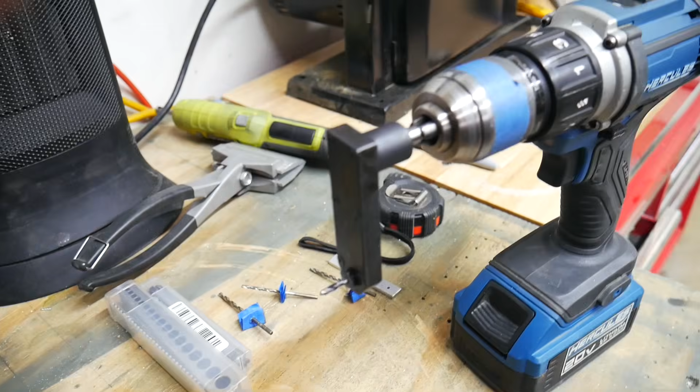All right, first up, I'm going to talk about this new tool that I bought. If you happen to follow anything having to do with Sonex, you've probably heard of a guy named Brian Cotton, very well-versed Sonex builder. He peruses all of the forum sites and Facebook pages and all that kind of stuff. And there's this thing that's come to be known as Cotton's Law, and what that is, is that the whole purpose of building airplanes is not to build an airplane, but to have a reason to buy tools.

And so he has mentioned several times to me that I need to get something called a pancake drill, or pancake drill adapter, I guess. I'm not sure exactly what it's called, but essentially that's what this tool is here on the front of my drill. Basically, there's a shaft that comes off the drill, turns a gear here, and turns several other gears until you get the little drill bit down here to spin.

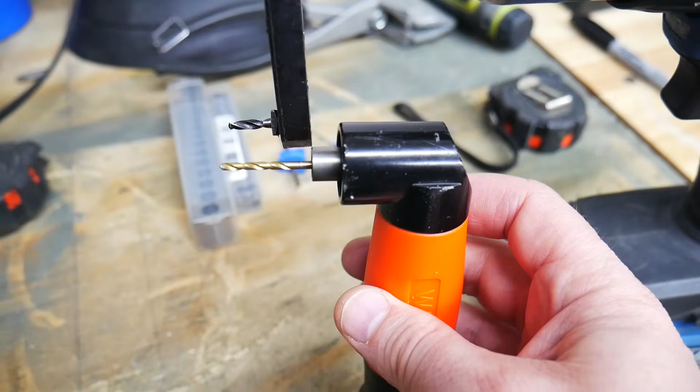And what that allows you to do is get in some really tight spots where you might not have any ability to drill otherwise. So you can compare that to this 90-degree drill bit here that I have, and you can see that, if I were to line up the tips of these two drill bits, I'd have to have a lot more clearance even to get this in there. But with the pancake drill bit, I can actually get into a spot that's only about 1 inch wide to be able to drill a hole where I need it.

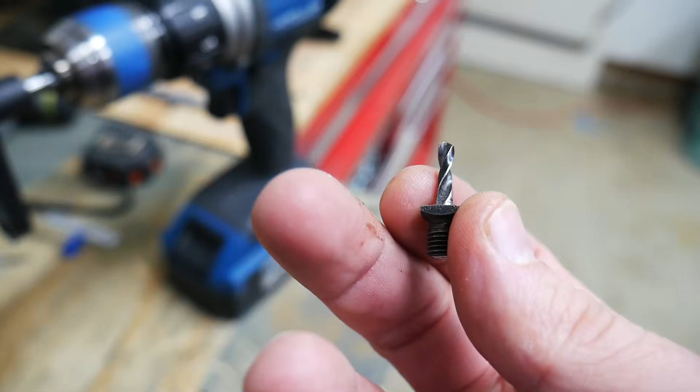And I also found another set of these little bits that you can get for it. These are 1/4 inch, 28 threads per inch drill bits here that screw in. And you can buy these in bulk as well, different sizes. I happened to find another used lot on eBay that had just a smattering of different sizes. So this is the size 30. I think I have a couple of them in the little bag that I bought. But I have used it to great avail, and it works really well. I'm very happy with it.

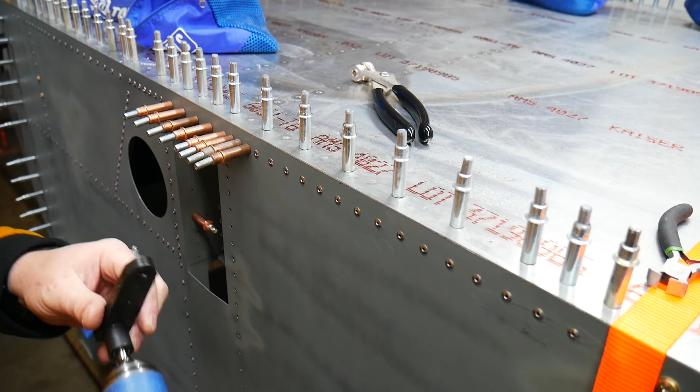So the throw on this is long enough that I can actually get into the second holes in here, which is where I need to reach, and still have enough room for my drill to get in there and do the job.

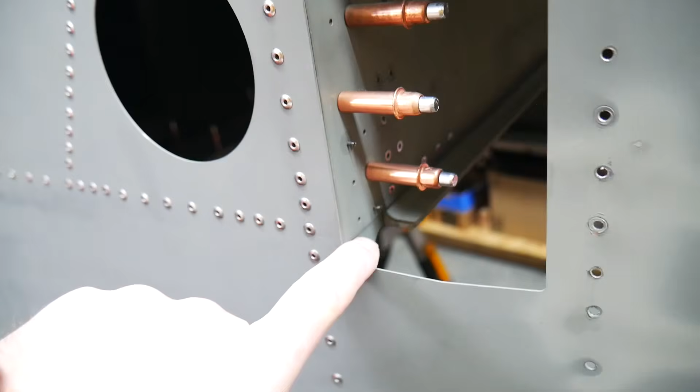So technically I could probably drill these holes from the inside, kind of just drilling in this direction with a longer drill bit. But when you put in a longer drill bit, this is so close to the edge here that my drill would actually bump up against the side panel, and it would possibly twist the drill bit a little bit to the side. To get this a nice straight drill, that pancake adapter is actually the right tool to do that. So thanks, Brian, for the suggestion. It seems to be working fine.

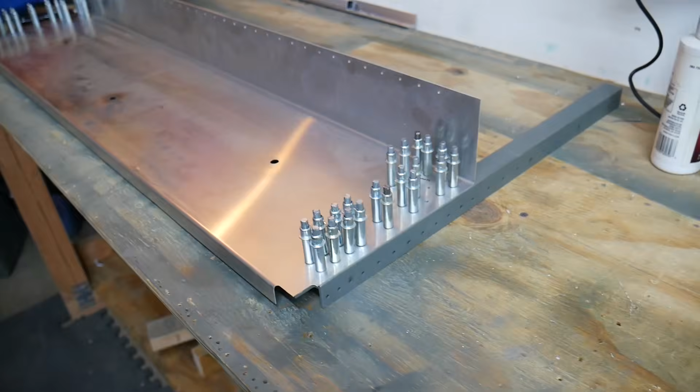Alright, now it's time to get on to sort of the meat and potatoes of this video. This is my forward tunnel Z. It matches up on the inside with the aft tunnel web, which kind of goes across the fuselage here. And the forward tunnel Z kind of goes across the front here, and we'll close this off into a box. And that is where our wings are going to slide into place, one from each side. Then we're going to have to do some wing rigging at some point where we put this all together and we have to drill a hole.

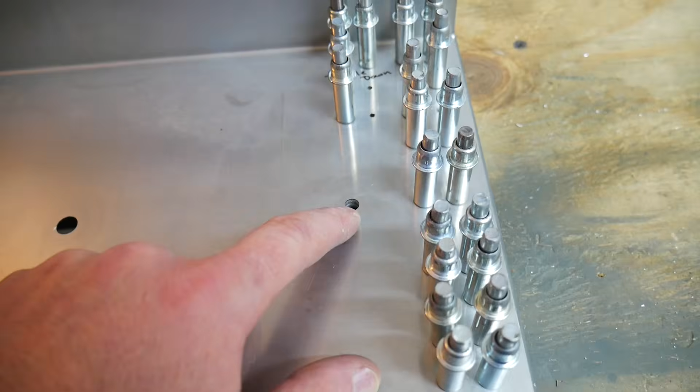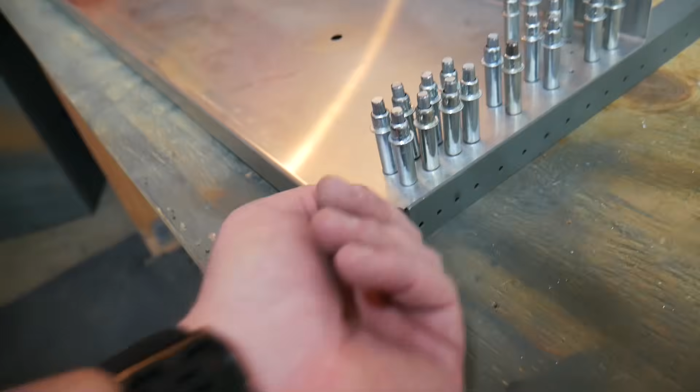Eventually this hole is going to become a 1/2 inch, and it will be drilled all the way through the wings, through the ends of the spars here as well as here, and that's what kind of attaches the wings to the aircraft. So basically what I need to do is there's a couple holes here that I need to pilot drill from the other end first, and then we're going to up drill all these to 1/8 inch size. And then we also have to countersink the parts that this attaches to. So this angle here, and there's a couple of other parts underneath here that also have to get that countersunk, so they have a bevel.

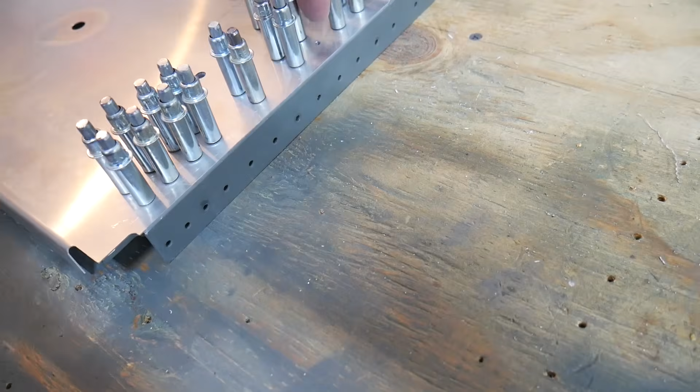And then we're going to have to dimple the holes that are on this side through the sheet, and that is to accommodate flush mount rivets that are going to go through here. So that's what we're going to do today, and hopefully this all turns out well, because again, now that Sonex is out of business, this is a pretty critical part of the airplane and will not be very simple to rebuild if I need to.

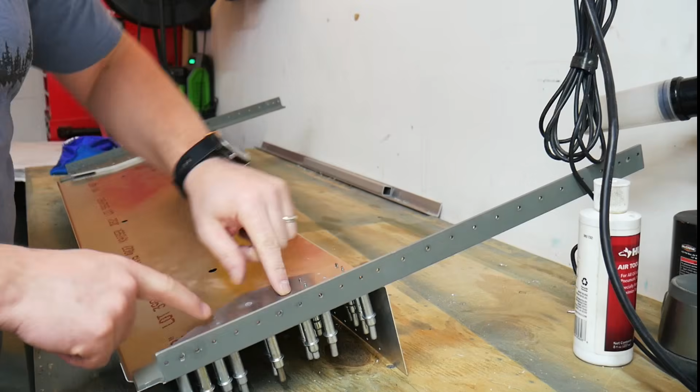Alright, so first things first, we're going to flip this over. There are several holes back here that don't go all the way through the sheet metal here. I count at least 4 of them, 2 here, 2 here, that need to poke through.

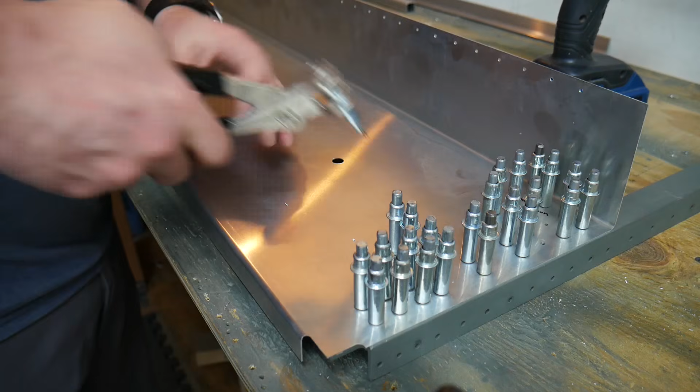Alright, so all these pilot holes have been drilled through. I put the clecos on the other side so that I can lay this on the table flat, and flat here so it keeps it square. So there's the angle that goes here. This connects up to the side wall of the aircraft.

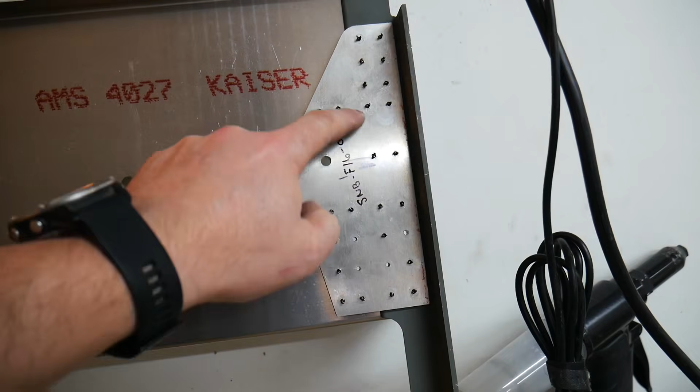And then there's this clip that goes over the top here. It's slightly larger than the square here on the side, which is, I think, 1.5 inches maybe wide. So that kind of goes up here. This piece covers all of that. And then there's a smaller clip that goes underneath here that just fits right around here. And it's not part of the square here. You might be able to see just a little bit of it poking out.

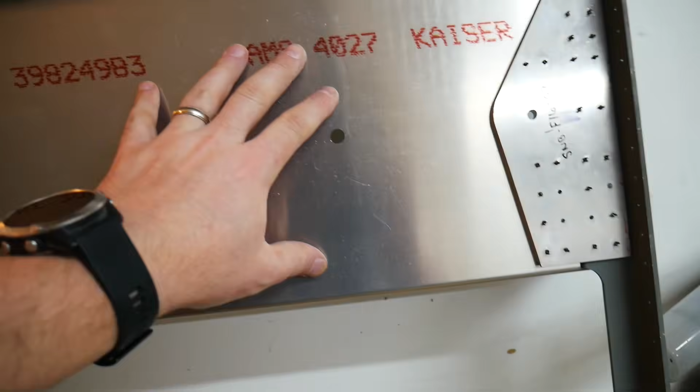So what I'm going to end up needing to do then is up drilling these holes here all to 1/8 inch. And then on all the parts that meet up with the skin, they need to be counter drilled this direction, so that we can put in flush mount rivets. And then with this skin, because it's going to be meeting up with countersunk holes on the other side with flush mount rivets, we're going to have to dimple the skin here in each of these holes.

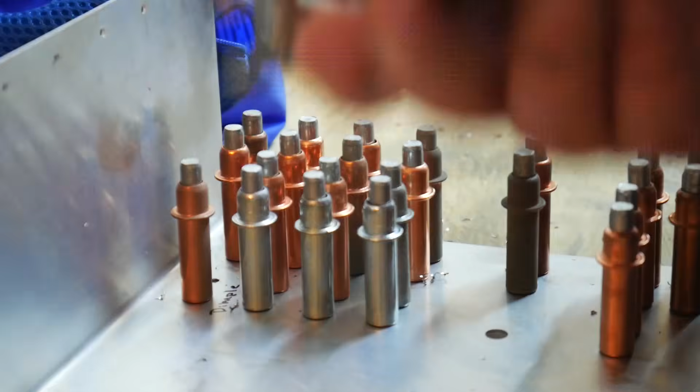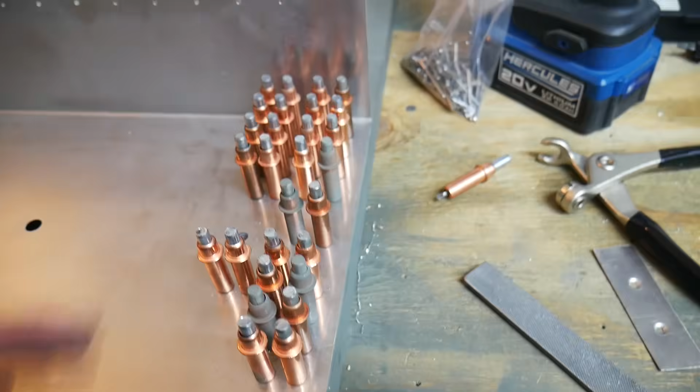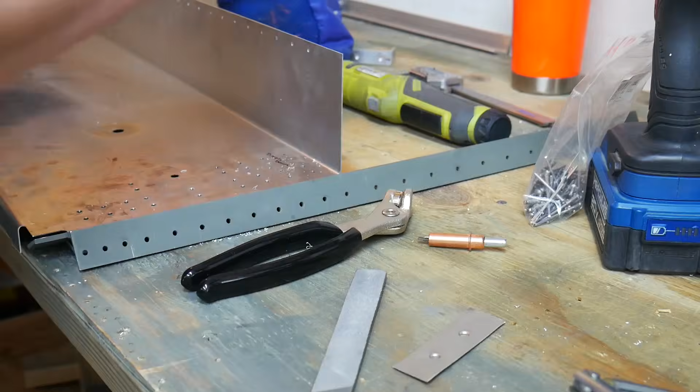Alright, all these holes are up drilled to 1/8 inch, and now it's time to disassemble this, and we will dimple the skin and we will countersink the parts that go underneath down here. Just marking this up so I know which side to counter drill. Make sure that I'm doing the right part.

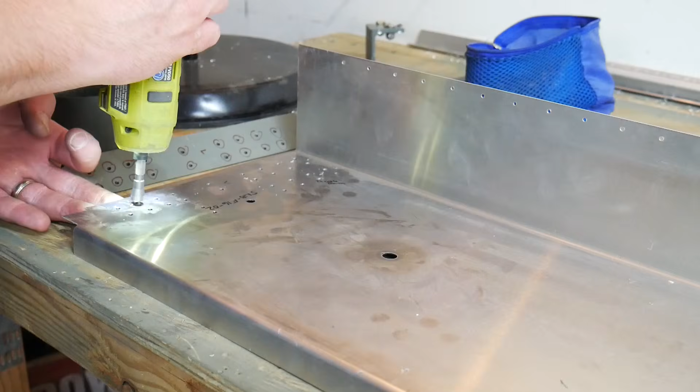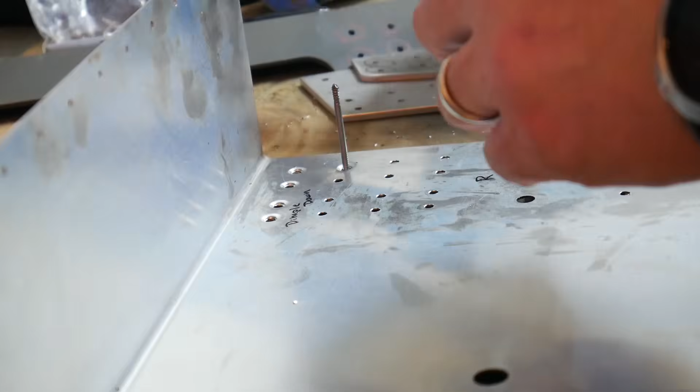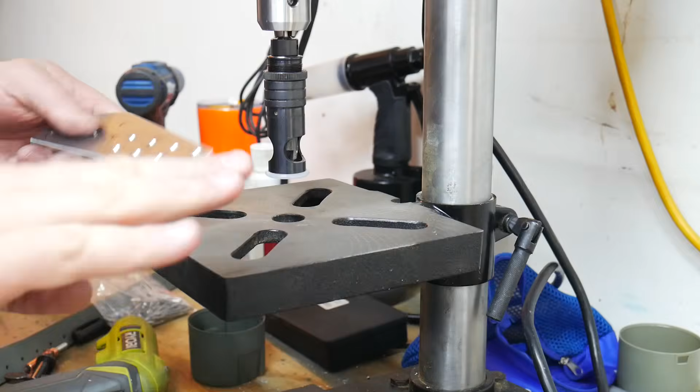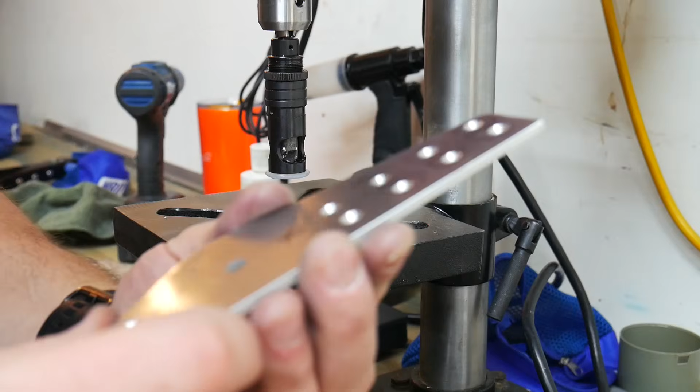This part does not get counter drilled, so I'm not going to mark it. I've already marked here to dimple downwards. I'm not going to make all the circles. I've already got it marked here so I know which side to do, but it needs to be dimpled that direction. Alright, got them all countersunk on this one part. Now to go on to the next part.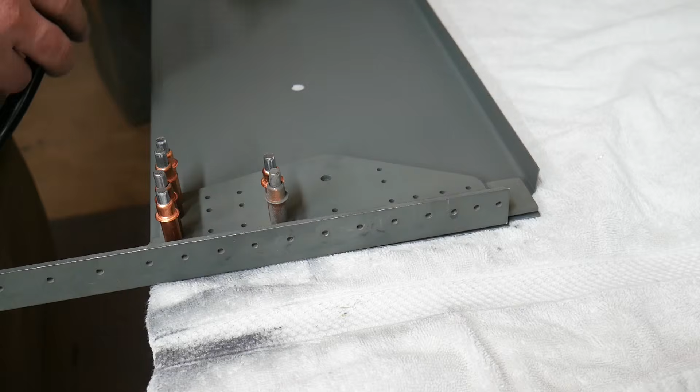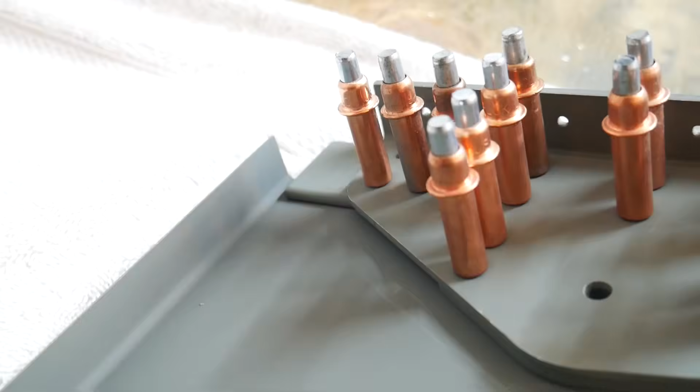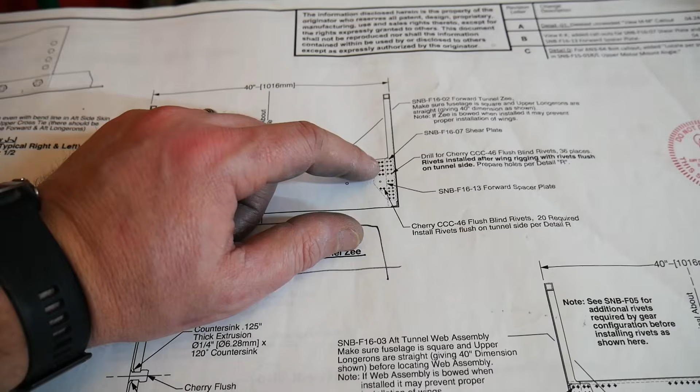Alright, the instructions here say that we should put in 10 rivets, 8 on top and then 2 down below into this spacer plate that's on the left. And then it says to leave the rivets out of this upright and the spacer plate that goes behind that. I'm not going to do that. I'm actually going to leave this all just drilled, and it's all dimpled and countersunk and all that. But if I go ahead and put these rivets in, then this area, that'll make it almost impossible to attach this upright to the holes that need to go there.

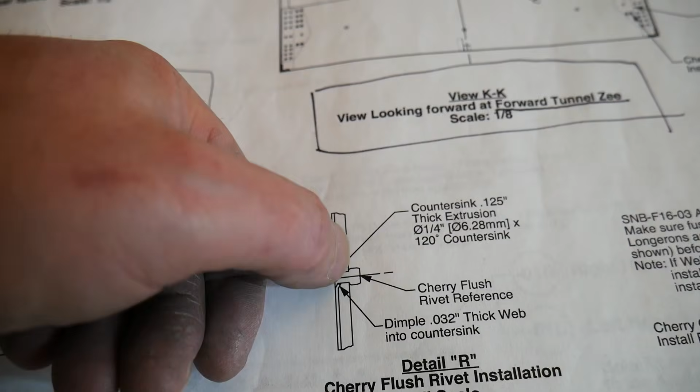So if you look at this drawing, you can see that the skin here is dimpled down into the hole that I've countersunk, and it's a tight fit. I don't know how I'd be able to get that upright in between there without bending the skin out, not significantly, but sort of significantly when you look at how close that is to the edge up here.

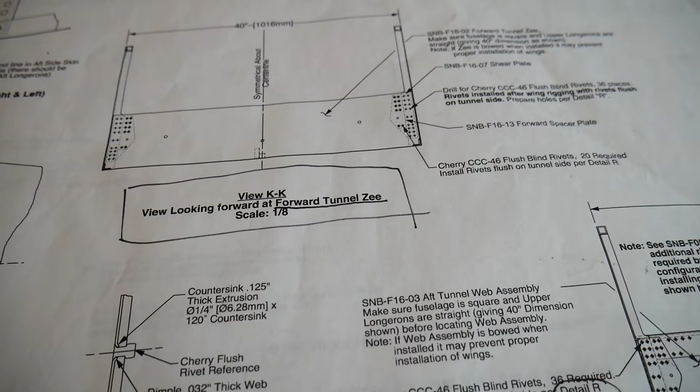And so I'm just going to leave this clecoed for now, and when the time comes, once the wings are ready to go and all this is in place where it needs to be, then I'll think about riveting that all into place. But for right now, I'm just going to leave it. It's always better to leave things until you know for sure that you're ready to rivet them.

Alright, well I think that's where I'm going to end this one. The part is, while not riveted, all prepared for rivets when the time comes. I'm happy with that. It's good to be kind of back in the saddle again and knocking out some assemblies here on my airplane.